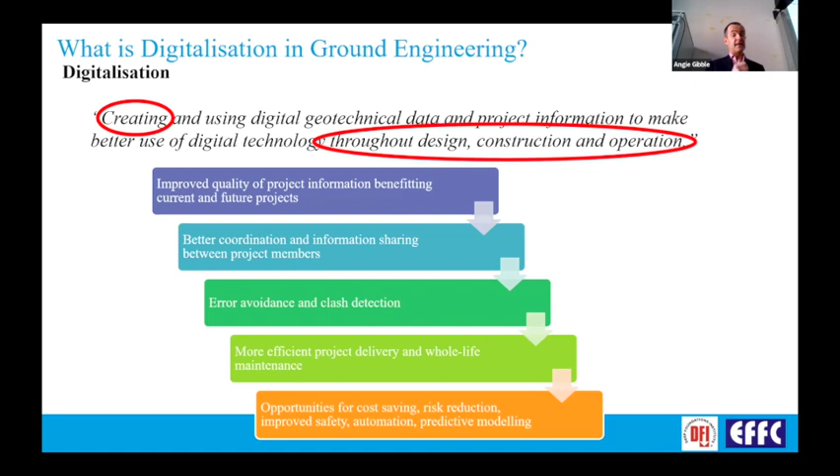Considering that project life cycle, it's very important that we think at the outset about how we create improved high quality data and project information that will provide future benefits, not just for that particular project, but for future projects as well. Once we've created that data, it enables much better collaboration and coordination between different parties if that data is shared in an open, collaborative and standard way.

I'm sure you're all familiar with the benefits we get from the avoidance of human error by using digital data, and the potential for clash detection, for example, when working in a BIM space. But we can also see that more efficient project delivery from using digital data brings real benefits, not just to the construction process, but also to the whole life cycle of that particular project and asset. So there are clearly many different opportunities for cost saving and risk reduction from digitalization, but it can also lead to improved safety on construction sites, automation of design and site recording processes, and it can help with predictive modeling going forward.

So that ethos of sharing data, doing that in a standard way, is fundamental to the success of digitalization.

I'm pleased to say those principles were embedded within the European Union's digital strategy, issued in 2020, and then the Data Act, which came into force in the European Union a couple of months ago, has at its core the recognition that digital data is highly valuable, that it should be shared, and it promotes the sharing of non-personal data in a very open and transparent way. It also promotes using standard data formats so that data isn't produced in a way that only the manufacturer of a particular piece of equipment or instrument can use it, but in a way that others can benefit from that data as well.

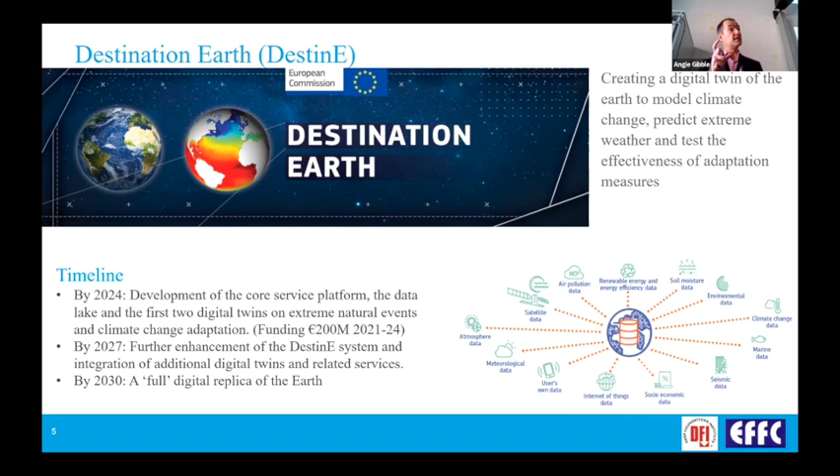It's also interesting to note that digitalization is big business. In the first three years of this particular project, the European Union are investing 200 million euros just to set up the groundwork for the data platform, the data lake, and then starting some of their initial modeling exercise. So significant investments are going into digitalization in that particular space.

But digitalization isn't without its challenges. The DFI organised and hosted a digital panel session in the UK last year at the British Geotechnical Association's piling conference, and again we posed a series of questions to industry leaders. It was really interesting to see that a number of the key challenges were all associated with data.

Whether that's the legal issues around data in terms of its ownership or the liabilities that you attract by sharing data, the issues associated with data formats, and the fact that clients aren't specifying data collation was one of the issues identified. And then also, when data is received, if it's done in a non-open or non-collaborative way, it can be very difficult to check and verify that data.

But it wasn't all doom and gloom. We didn't just ask for the problems, we also explored what we need to do as an industry to solve some of those issues. The key aspects that came up were making sure we have more industry events to help share best practice. That was really the driving philosophy behind today's event, bringing together diverse views from across Europe and the wider globe to get people's experience of best practice and how we can share that amongst one another.

Another key challenge was the requirement for standardization of specifications around data sharing and how we look at more common data formats. In one of our presentations today, Jamie will be sharing his thoughts on the work DFI have been doing globally on standard data specifications.

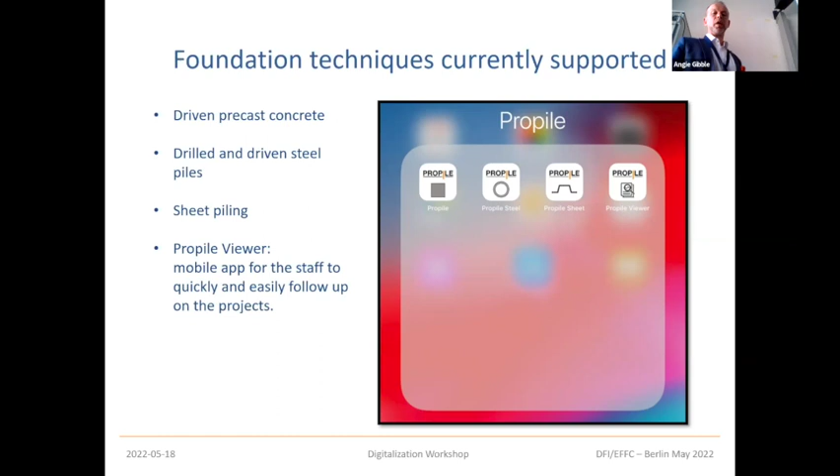Through a standard web browser, you can update, edit if you wish, and sort and find the data that you need to have a look at. As I said, you can extract the data and work in Excel. Nowadays it has come to the point where they really work in the ProPile system, but for a while they would extract the data and work in Excel because they were used to working in Excel - but it's getting better and better.

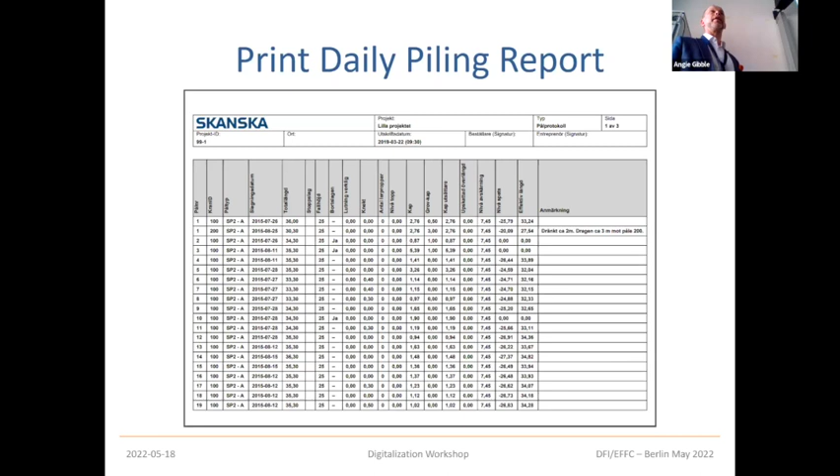Of course, you can print the daily piling report into PDFs to hand over to the client, and you can choose whatever columns you want to show or hide, depending on what's required in that project. We also have pile cost adjustment, so you can add prices into the system for what the pile costs, for an additional meter or less. So at the end of the day, you can print that and hand it over to the client and request money for additional work.

There are statistics features, so you can follow up and do prognosis. You can sort of pick two dates and see how many machine days it was between those two dates, and how many piles you've done, how many meters, etc. You can also do prognosis.

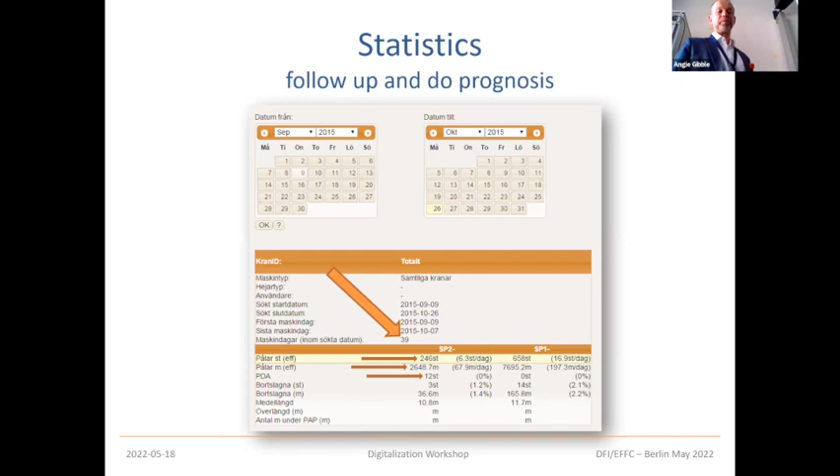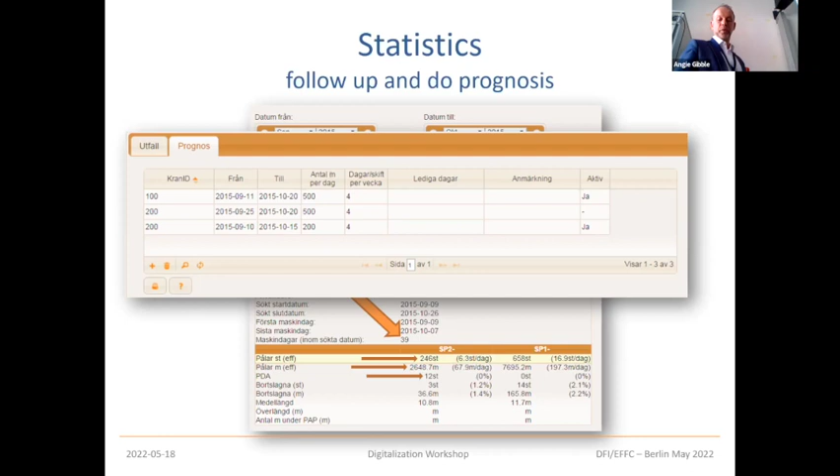You can get this in numbers as well, so you can tell how many piles you've installed, how many meters have been installed, and how many days are left until you're done.

One of the features is the barcode scanner. You have a barcode scanner that is connected to the rig, not physically, but through the web. The scanner is also connected to internet, and you state in that app which rig you belong to, so that rig can see what piles he has in front of him in his stock.

You can scan when the piles are delivered on site as an acceptance inspection, and then they will be in the site stock. You can scan the pile when it is to be installed, when you lift it up and start hammering. This, of course, improves the traceability and accuracy of data.

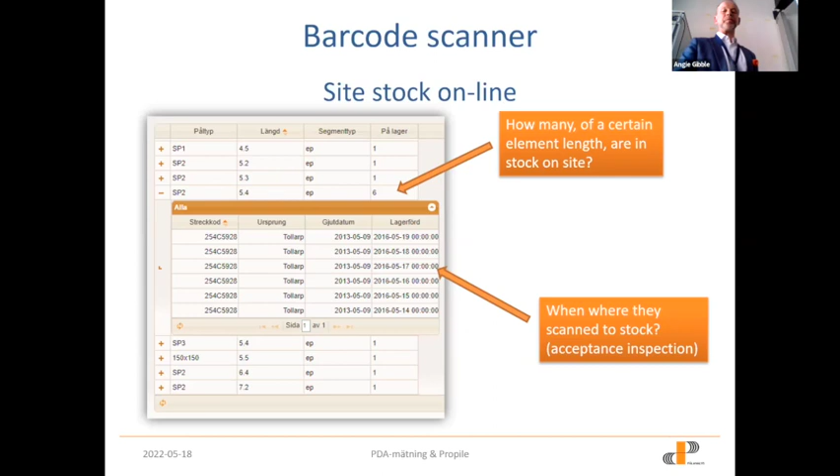There's also traceability features, so if you get an error, or bad concrete or bad steel or whatnot, you can find that barcode and see into which piles these segments went.

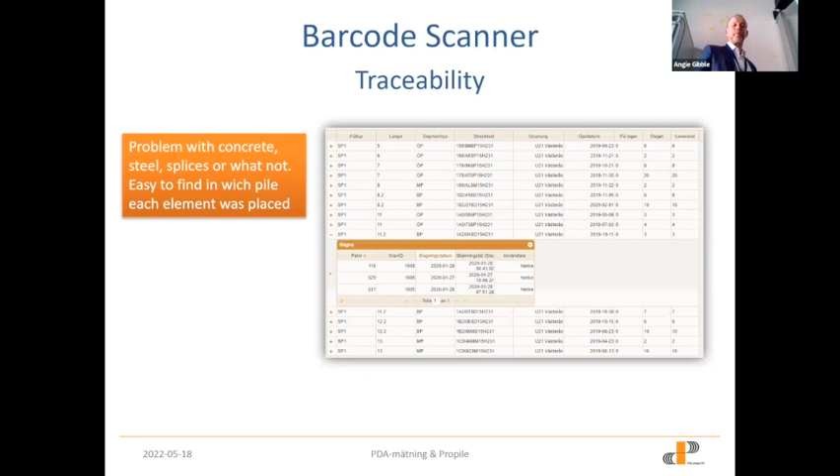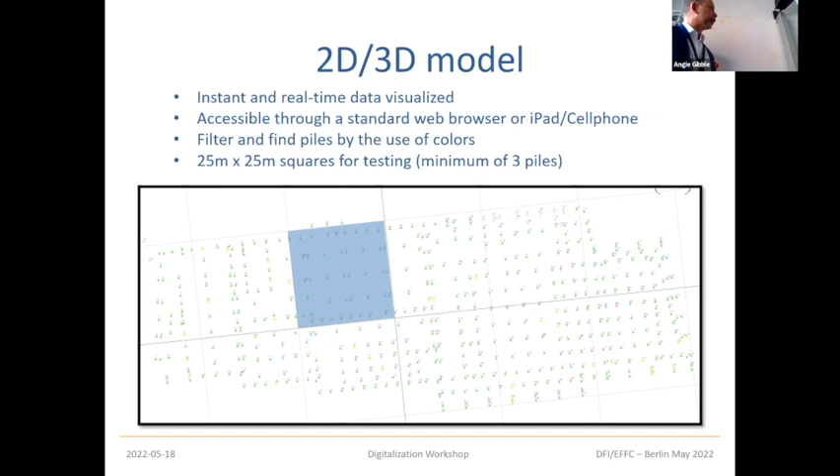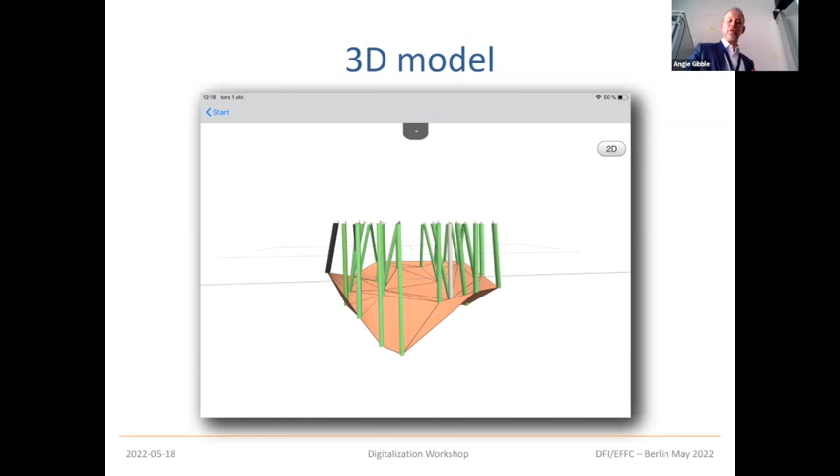Then, of course, you can go into the 3D models, so you can view it in 3D. It's quite handy in at least two perspectives, but I would say more.

What we've done now is let the computer help the site crew estimate the pile lengths. The green piles are installed and the gray piles are yet to be installed. You can click on any of those gray piles and the computer will tell how long that pile can be. You can also click on a button and get all those lengths out for piles to be installed - so the computer helps you with estimating the pile length.

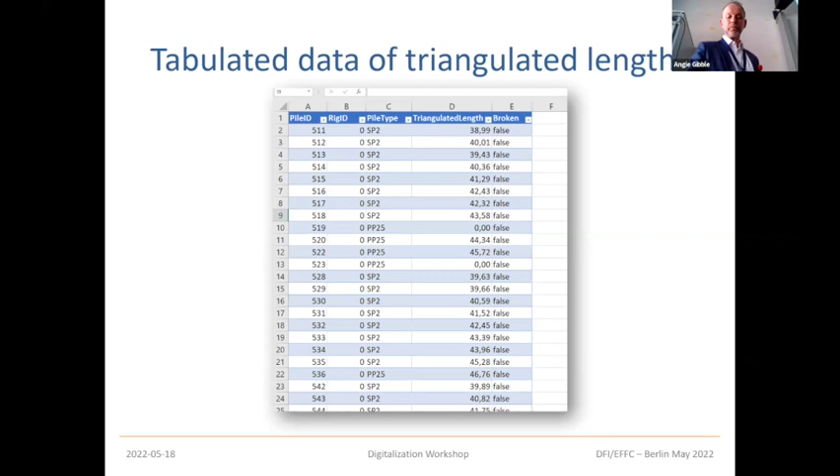It's instant visualization of actual data, and this has been proven very successful when it comes to the contractor discussing problems and requesting additional costs.

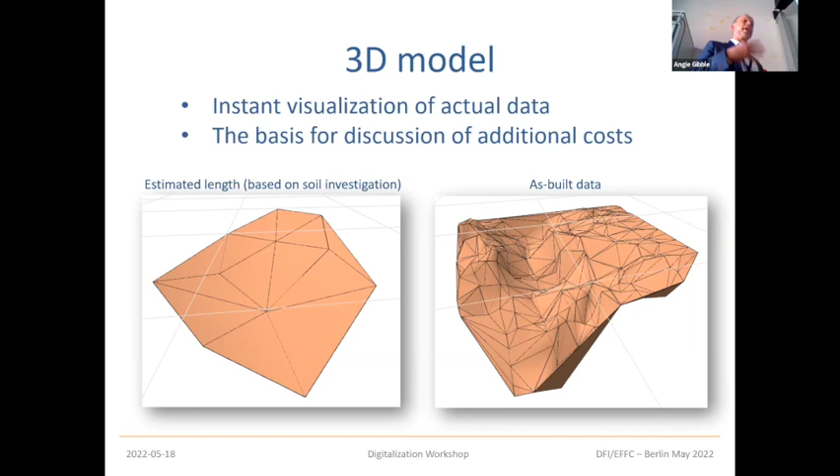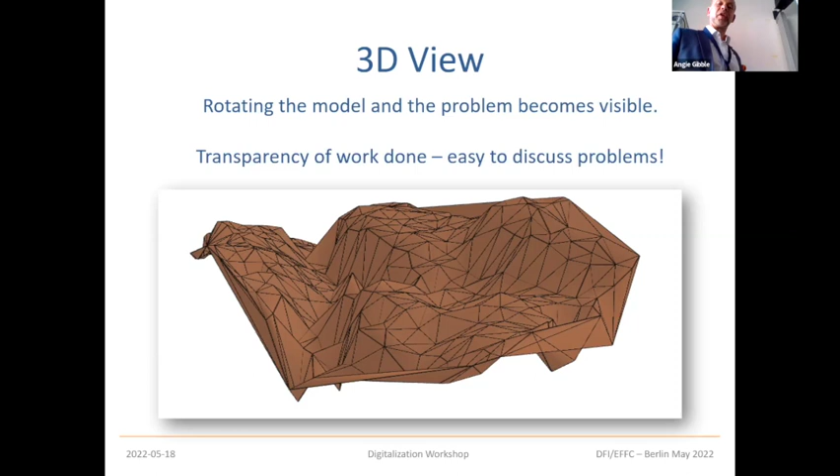So they broke a lot of piles there, but yet again, it was easy to talk to the client and request more money. So it's becoming transparent, the work is transparent to the client.

So what's coming next? We're working on getting the PDA data into the system as well, so you can add the capacities of the piles. You can think of anything, blow counts, concrete volumes, or installation time, anything that makes the model better and easier to discuss problems with the customer.

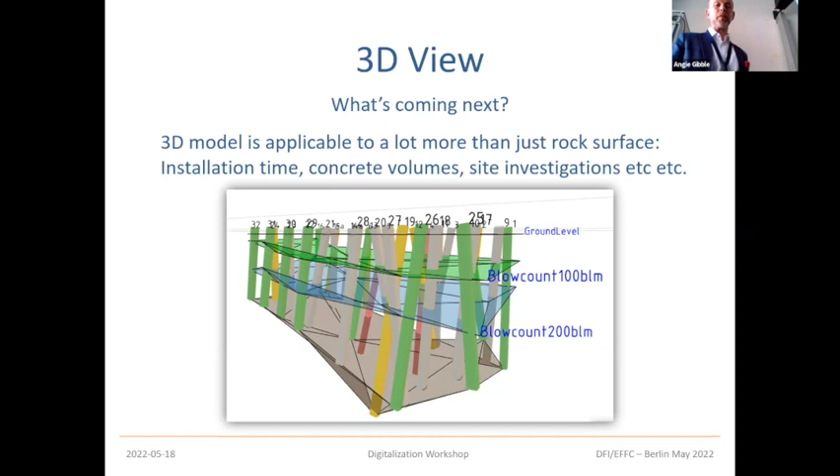The key features in the system are that it makes data available for everyone involved in real time, and it's all accessible through standard web browsers, iPhones, iPads, and so forth.

The system features are currently centered around the requirements and wishes of the piling contractors. We haven't really thought about the bigger picture yet. We started off small.

The barcode scanner improves the accuracy and traceability of the data collected. The implementation of the online 2D and 3D model has made it easier to understand the foundation and the project, and it's transparent to the client.

Finally, I want to address the key development strategies we have. We have online, real-time data, which is probably how most software is done nowadays, but it's still important to emphasize.

What we did was focus on actual needs. In our case, it was the site crew and the processes on site that we focused on, rather than the design or anything else. We had an actual problem that we wanted to support and digitalize to help them in their work.

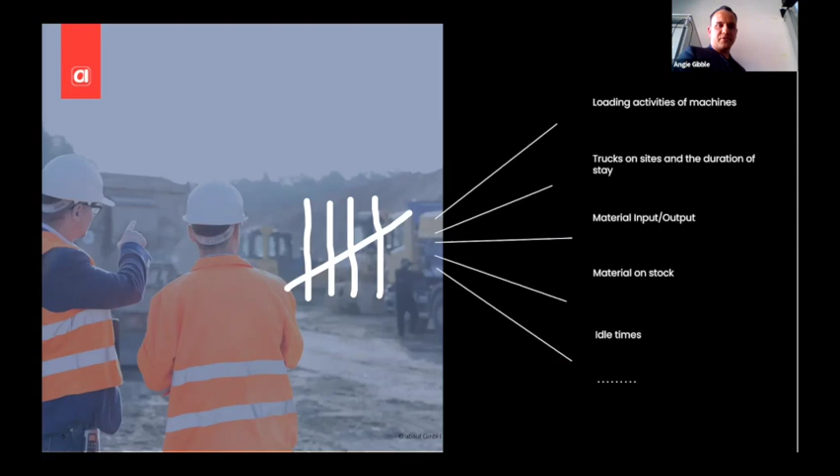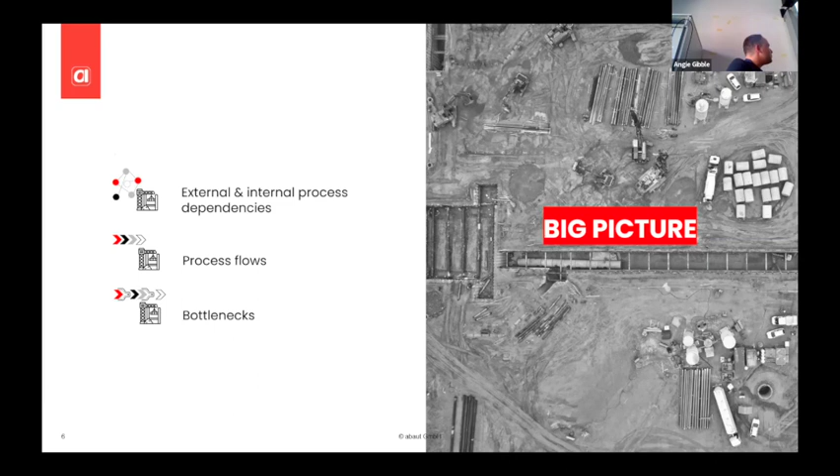So the result was, we got a big picture. That means we were able to see external and internal process dependencies. We were able, after analyzing the process flows on the construction site, to also see the bottlenecks. That was awesome.

So the results, or the reasons we detected — here are a few examples. First example: the excavator was just too weak for the task it had to do, so there were idle times, and the semi-trailers were queuing.

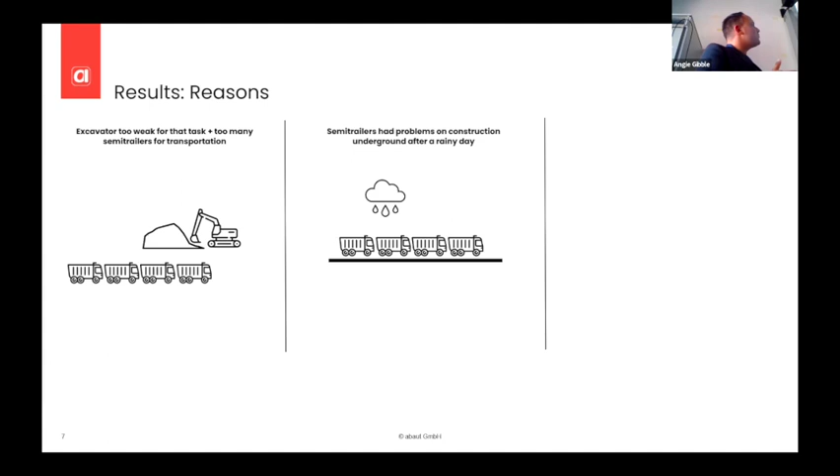It was also a problem that after a rainy day, the semi-trailers had problems with the underground, so they reduced velocity on the construction site. We also had a problem with the material supply chain. We also built a trench with pipe.

The material was not always on time on the construction site, so we had a delay of 1 to 2 days, and that also causes idle time of the machines. So here are just a few examples of what we did.

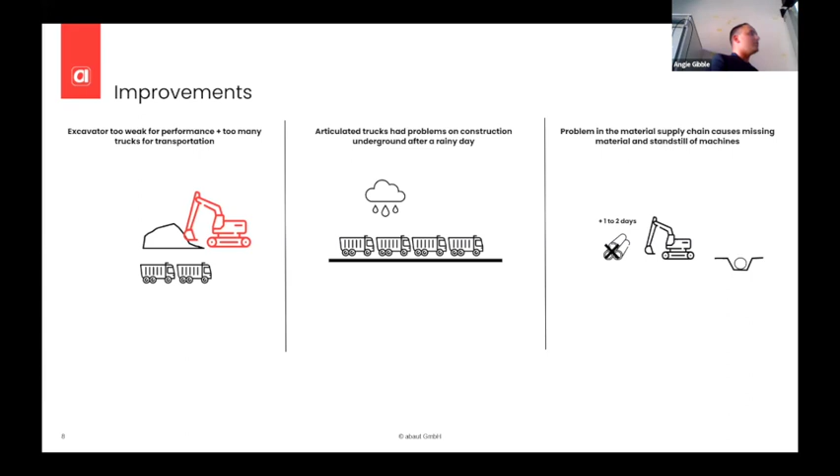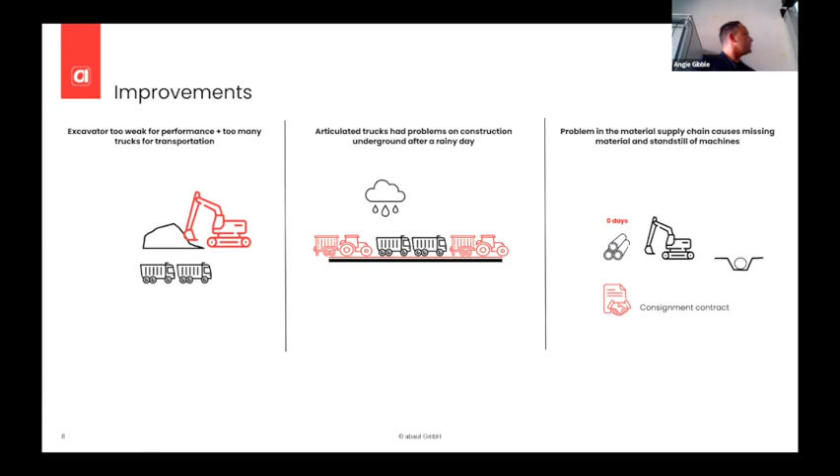It's really easy once you have the data, the data of your Strichliste. We changed the excavator to a more powerful one, so the performance was better, and we reduced idle times of the trucks. For the bad velocity of the semi-trailers underground, we brought in some semi-tractors into the logistics circulation. And last example, we negotiated with the contractors and changed the contract to a consignment contract. In the end, all these actions improved the process and the performance on site.

So I asked myself, wouldn't it be great to see the big picture from all your job sites digitally, in real time, from anywhere and anytime, fully automated. I thought it's an awesome idea. So the only thing I need is data.

And here's the problem. What I experienced on the construction site as a construction manager: either you don't have any data on your site in the execution phase - and the execution phase is really important, not the planning phase - so you don't have any data, or you don't have sufficient data. It's a huge effort to generate the data. And the last point I experienced is that data are often trapped in data silos.

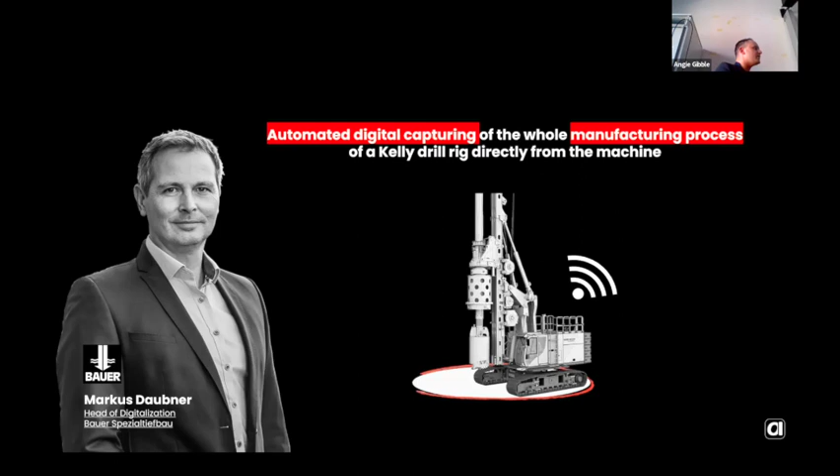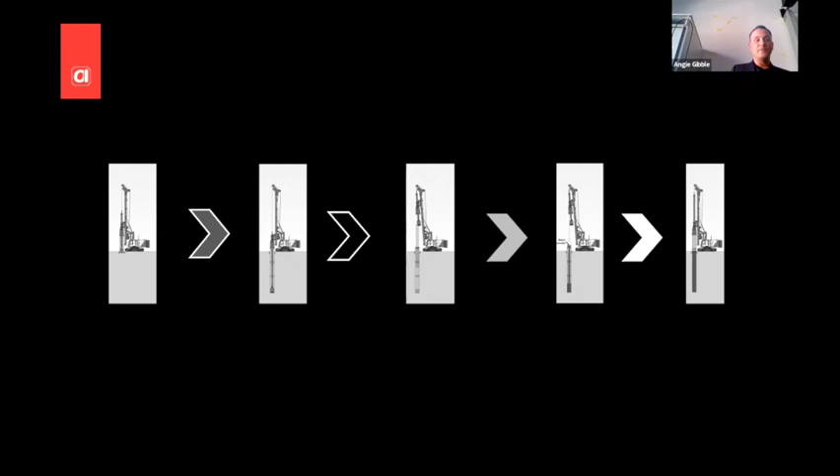So again, I need to admit, I was not the expert, and still not the expert, in deep foundation. This is the process of a Kelly rig. You have the main process: drilling, filling, emptying, inserting the reinforcement cage, concreting, pulling the pipe after concreting, and also sub-processes, for example tool change or something.

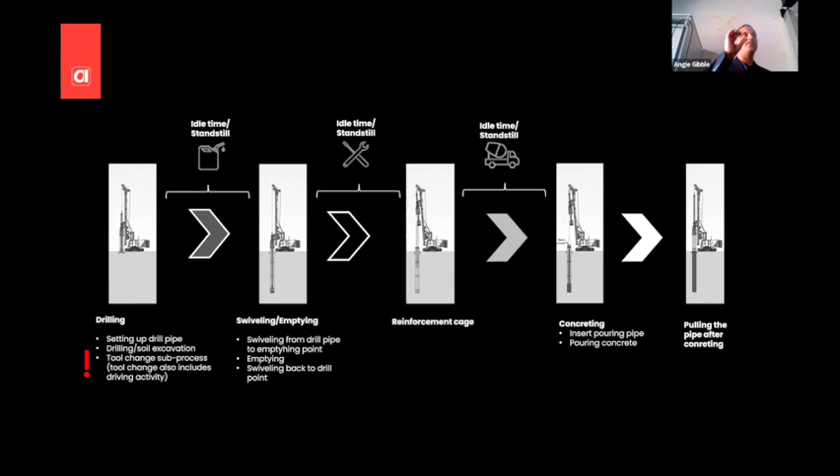Between all these process events, there could be idle times, a standstill, because of necessary works - for example refueling, repair works, or just waiting for the concrete truck. So when you only have sensor data, it's quite hard to detect specific processes. For example, it's possible but pretty hard to reliably detect things like tool change, the reinforcement cage, or the concreting process, just with sensor data.

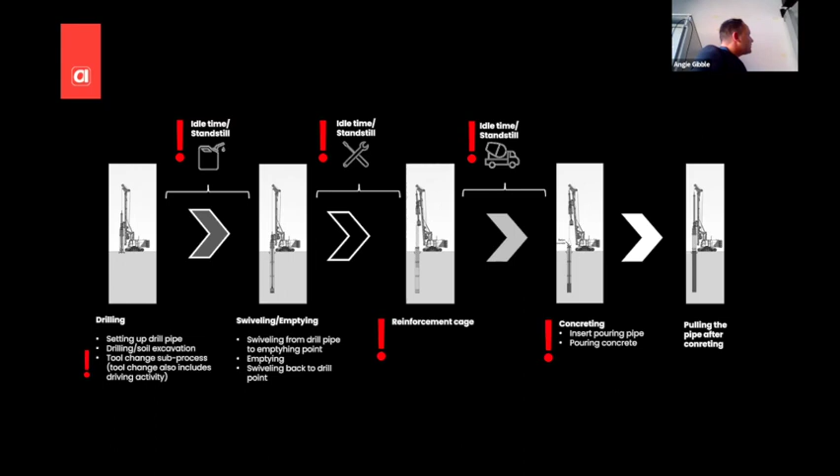In my opinion, and what we learned, it is impossible to find out the reason for standstills on site or idle times just with sensor data - for example, refueling, repair works, or concreting. So in general, this is more the general perspective.

Our customers, when we start to work with them, machine telematics data are the absolutely basic data, and it's perfect, it's needed. But again, when you want to see a specific process, really want to get that big picture and do that deep dive into your process, then it's necessary to add source data, really to get the information about external and internal dependencies. As I said, not just with sensor data, it's quite hard.

With sensor data, you would have in specific processes information gaps. And the most important thing with sensor data, you don't get the why when you have the bottlenecks - really the reason why a process on site is not really good. So my opinion is, what I learned the last four years, you can't eliminate bottlenecks if you don't know the reason. So the big question is, what did we do with Bauer or with the Kelly rig to fully automate it?

The task was to recognize the process. We added a new data source, and we taught the Kelly rig machine to see and understand the process environment fully automatically. That means we give the machines eyes.

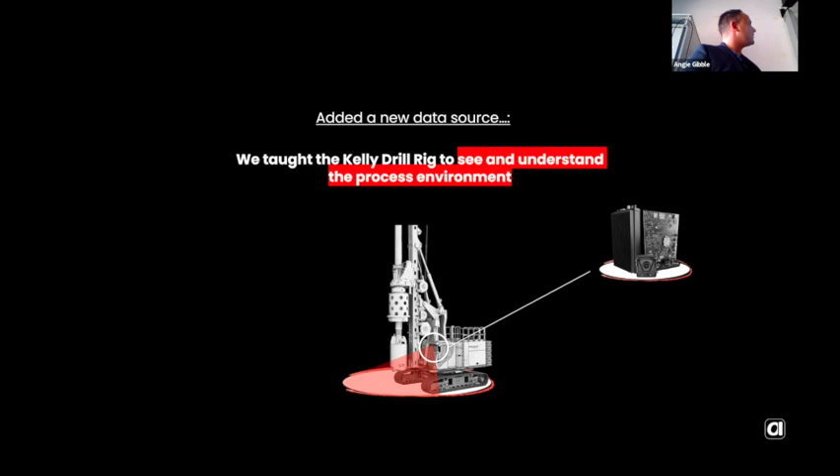We installed these devices, and this device is a hardware device you can purchase on our marketplace, the Bauer marketplace. So it's an intelligent plug and play hardware. It's an edge computer where you can also plug in a camera. That is what we did at the Kelly rig machine.

Again, it's plug and play. You can install it in less than 15 minutes. No CAN bus needed. It's really just plug and play, and the great thing is you can really install it on every machine - a drill rig, we installed it in Switzerland on big mining dumpers and excavators.

It means we don't generate data every 10 or 15 seconds. Every time something specific happens - for example, the swiveling, or the machine stands for more than 5 minutes - we can generate an image and do the analysis with the sensor data plus the image data. So at Bauer we have two lines in the backend, the SDP and the IDP. The SDP stands for sensor data pipeline and the IDP for image data pipeline. We are able to process these different kinds of data and fuse them after a specific time to really understand the process.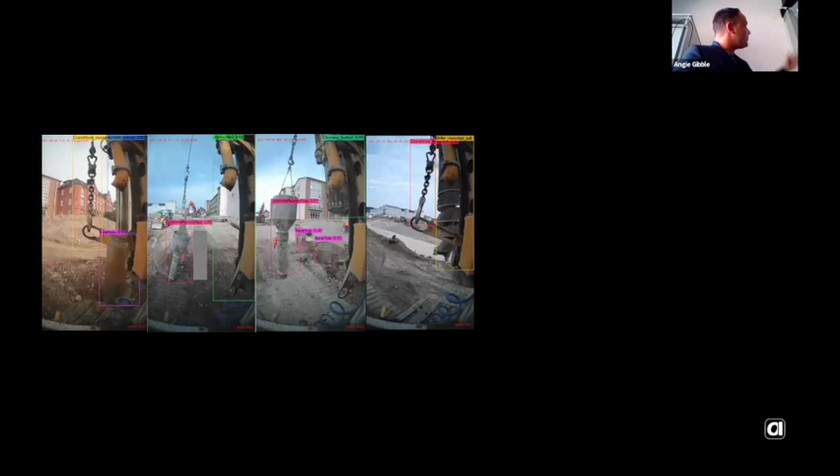Here are a few examples of how the image classifier, or image algorithm, works and detects things fully automatically. As I said, for example this pouring pipe - quite hard for a sensor to detect that process - and these are image algorithms which detect that process in the images. For example, also the drilling - we have here the swiveling or drilling, and swiveling then to empty the rig.

That is also important because you see the soil, or the color of the soil. So you could also train algorithms, for example, to detect specific soil classes. Maybe we didn't do that, but it could be possible. And the last thing here is an example of a reinforcement cage and setting of a reinforcement cage.

So to dive in a bit deeper, this is how the artificial intelligence, the image classifier, really detects some examples during construction activities. This is the first example - as you can see here, the Kelly drill rig just does the work and the swiveling. You can see the rectangles.

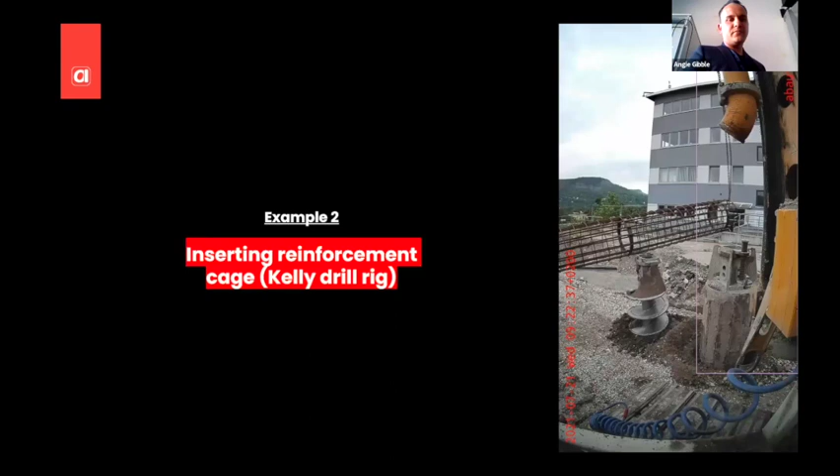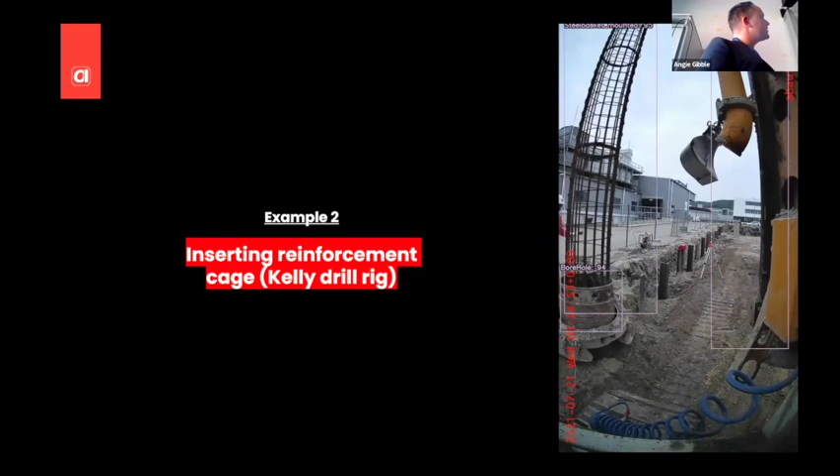This is an example of inserting a reinforcement cage - I hope this is the correct term. So as you can see here, again, the image classifier detects also the borehole, for example. And of course we have for each image also the geo position. One moment. And the last example is inserting a reinforcement cage.

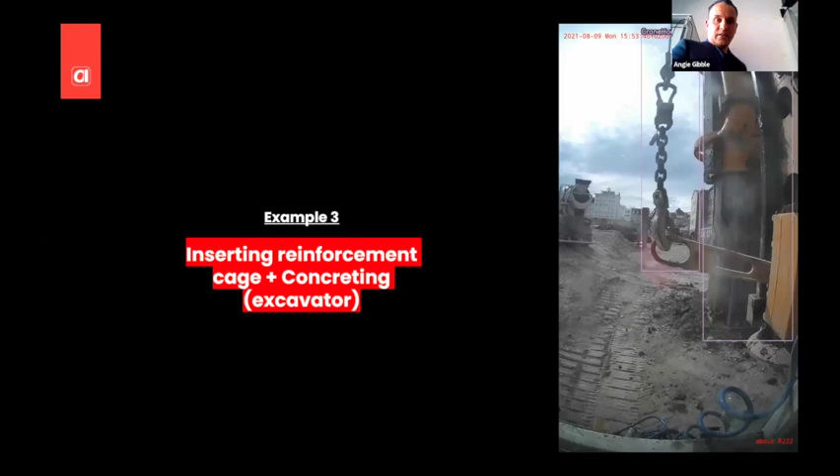It's an external process, not from the Kelly rig. As you can see here, it's inserting the reinforcement cage and also the concreting process afterwards.

So all these are process information, and this process information is delivered to the backend of our system. Additionally, the KPIs are directly transferred to a software as a service dashboard, where you can analyze and see the process fully automated.

I don't want to explain that in detail, but you can really see the duration of the process and things like that. And the most important thing, again, it's fully automated, no manual work to do.

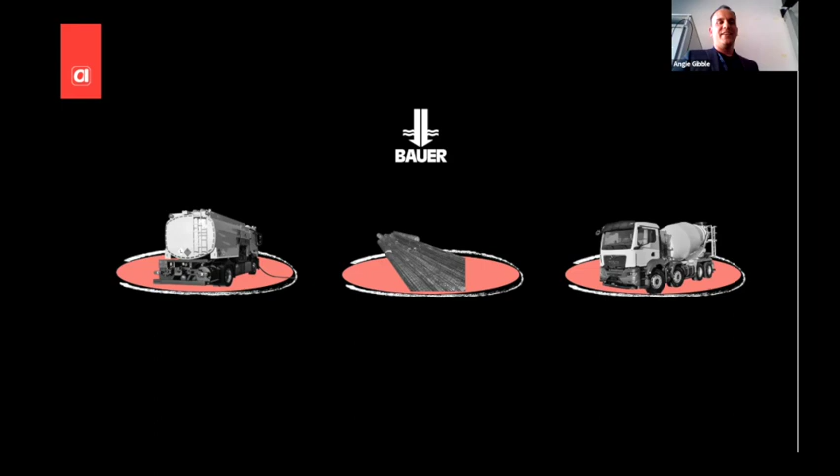A little teaser, I'm not allowed to speak about that. With Bauer, we currently work on other algorithms and use cases, especially for finding the reasons for idle times or standstills. As I said, I'm not allowed at the moment to talk about this, so that's to be continued. Maybe next year we will see.

Now, at the end, my conclusion. What data and data analytics, and this is a really good example of Bauer Spezialtiefbau, can do, or what you can reach. The first thing is, the big picture you will get with data and data analytics.

The second point is that with data and data analytics, you will be enabled to make faster and better decision making on sites. The third point is, of course, idle times and the reasons, so the efficiency and the productivity you can increase. And the last point, really important, we save resources and reduce environmental impact, which in my opinion we desperately need for our society to do.

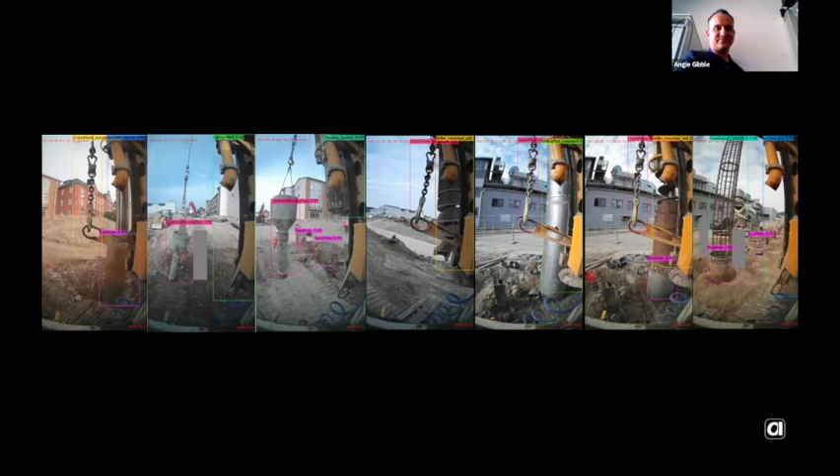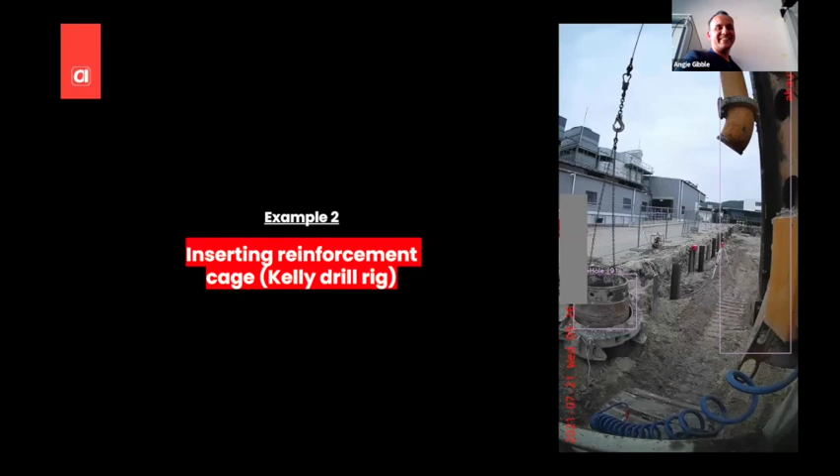Yeah, absolutely, thank you. I was wondering - the example you presented is primarily related to building construction, right? You mentioned a few other applications of image correlation. I was wondering, have you used these devices for damage detection, or for defects, before-and-after pictures, or like you mentioned, identifying excavation material type? Can you explain a bit more about these methods, or was what you mentioned more about external data, which is quite hard to get from a machine?

So what I presented in the last slide - in the end, we're working on that to really find the reason, but I'm not allowed, as I said, to talk about this. Maybe another example: we also work for the German railway provider, Deutsche Bahn - quite famous. We have two big construction sites there.

There we detect as soon as a truck or any other vehicle enters the construction site, so we count it, and we also analyze what it has loaded - for example sand, soil, or stones. We analyze this and Deutsche Bahn gets information about the mass flow on the construction site, and also has the possibility to check invoices. All the systems are also used for claim management, which is quite interesting - sometimes just the image itself, since we have the image in the system, so our customers just use the image for better claim management possibilities, I would say.

Or maybe Markus Daubner from Bauer Spezialtiefbau could answer that.

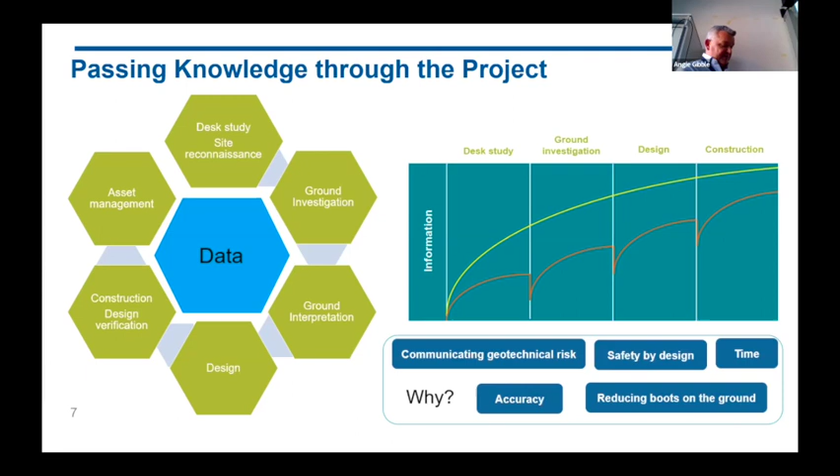So as I say, it will just generate some standardisation there. I think, from a contractor's point of view, I deal with contracting.

I look at the rigs out on site, physically putting the piles in the ground or the foundations in the ground. You've got to look at the real-time collaboration we have out on sites with the design office and into the sites. I think the data transfer we have at the minute is a lot better within the design office, within the planning stage, than it is down at the construction phase.

Perhaps the presentation we've just seen in capturing data at construction stage, I think we agreed there, back in 2018, there was a lack of information, or there was siloed information.

The way to get that from the site is to have simplistic information or simplistic apps and tools to capture that. If you've got the very clever information from the imagery we've seen in the previous presentation, and that can be fed into a standard application so the guys on site can actually use it and have that information, they will be able to take the information from the design office, look at it in a simplistic way, input the construction information in that standard format to feed it back.

So getting standardised tools that are talking standard language is key. And again, with Balfour Beatty, we are developing standard applications now, as other companies are. But I think the key around that is getting the consistency in the language we're using in those applications, or else you move from one company to another and you're using it in a different way and capturing it inconsistently.

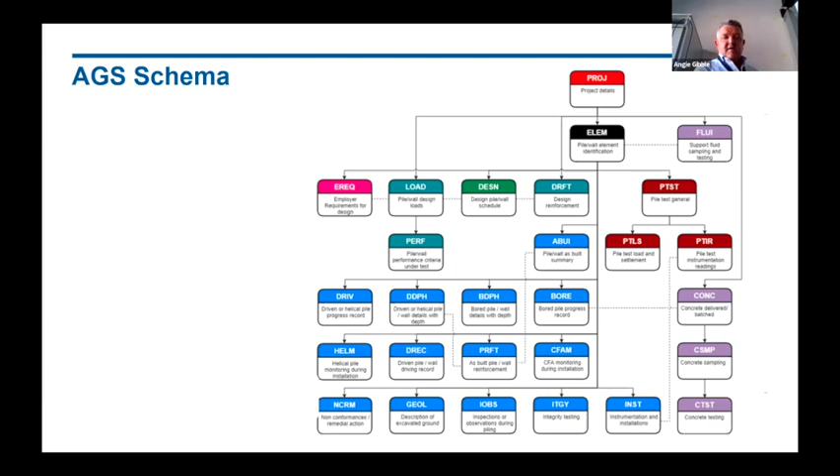So as we said, that's in a trial stage in the UK at the moment. The beta version has been developed, it's out and being trialled on HS2. HS2 have agreed that that's a very good project to try and trial and get this running through in a standard way.

Problem with HS2, it's a very large project. There are 7 different construction sections going on. Most of the different construction sections are being led by joint ventures, both at construction phase and at design phase. So you've got a lot of people involved to try and make this work and to try and get this trial working.

The benefit of HS2 is they did have the foresight on RSP2 to do a lot of preliminary test piling well ahead of the construction works. That was viewed as a very good area to trial and to give some testing to this AGS format, the preliminary test piles. If we could turn the preliminary test pile data on all of these 7 different contracts on HS2 into an AGS format, it would give it a real good test.

The problem, as I said, is we've got a lot of different people involved. So this is an example from two of the contracts, the N1 and N2 contracts, that I've been involved with. Here we can see we've got HS2 involved, we've got a principal contractor involved, which is a joint venture. We've got a design JV involved, which is a joint venture, and we've got a piling subcontracting organisation, which is also a joint venture.

All of which have got to buy into this trial and develop and learn this new way of working, trialling AGS for no real benefit, because it's not contractually required on HS2. It's just something that if we did it, it would give us benefits. And we can see the DJV, they've got an element to do, they've done that without a problem. They've worked together and got the AGS format going.

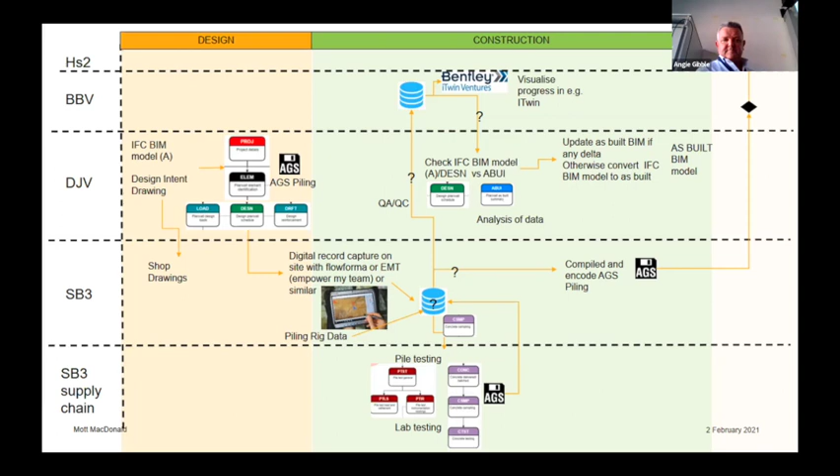Okay, so moving on, back in 2018 when I presented this stuff, I thought there were a number of blockers, a number of issues that were getting in the way. Some of those are the same, some are different now. I think I picked out 5 main areas that we have issues with in getting standardized digital data working properly on foundation construction sites.

One is, by definition, foundations are typically at the front end of the projects. So we find that projects aren't set up, they aren't running smoothly in the way they are by the end of the project, or by the superstructure or whatever else is being put on top of the foundations. I think there really needs to be a digital mobilisation as well as a project mobilisation. We're all mobilised to get onto site, but we mobilise and start building things before we've actually got the project set up properly digitally.

I think when we start building and getting going, the follow-on stuff that comes after the foundations is a lot more advanced, because there's more time to get the digital processes embedded within the project processes. Does that make sense? So I think having a digital mobilisation, and reference to digital mobilisation at the front end of projects, would be the solution.

Two of them are around shouting about what we do - conferences like this, I think, are areas where we're seeing excellence and where we're seeing good things going forward. So we have to educate clients, and we have to justify the cost of learning curves, I think.

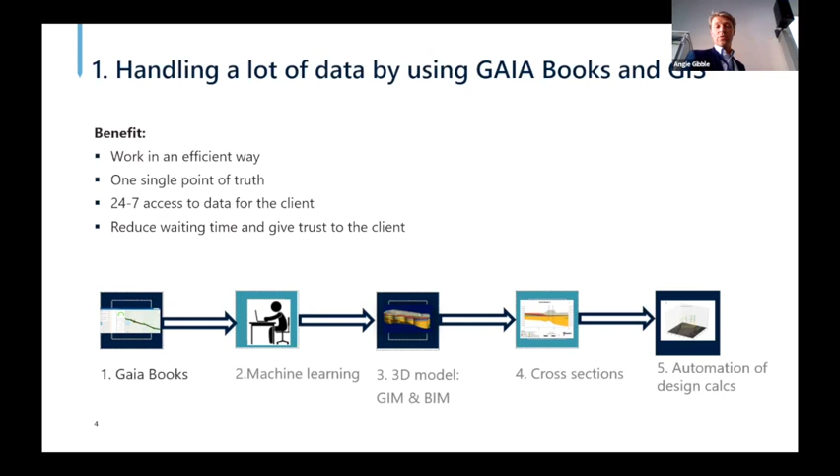Now here you can see how it is looking. So here you have the A9 again, from here to here, 2,000 CPTs and 120 boreholes. The locations are there. When you zoom in, it looks like this. All the data points are there.

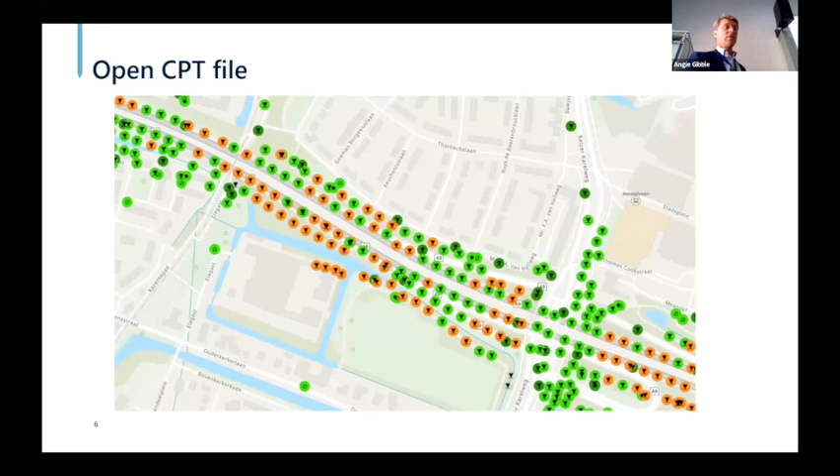And when you click on one of those data points, you get into SharePoint, and then finally you can see the CPT. It's nice to look at the CPT. You see here in the beginning a sand layer, but then from -4 until -12, there's a lot of soft soils, clay and peat. It's really a difficult area. You can also see that we are underneath sea level with the surface.

So the whole project is underneath the surface level of the sea. Now, when we collected all the data, we said, okay, now we have to do the interpretation and classification. So we have to look at the CPT data and define the layering, what kind of layer, where does the layer start. And since this is a lot of work, we were again pushed by the contractor to do it as quickly as possible.

So what we decided to do is reduce time by using machine learning, training the computer to classify and interpret soil data. We also wanted an unambiguous interpretation, so not like one geotechnical engineer classifying a layer as peat and another saying it's soft clay. Then you get discussions, and you don't want that. Also, for the geotechnical engineers, interpreting 2,000 CPTs by hand is quite boring, so we wanted less repetitive work for the engineers.

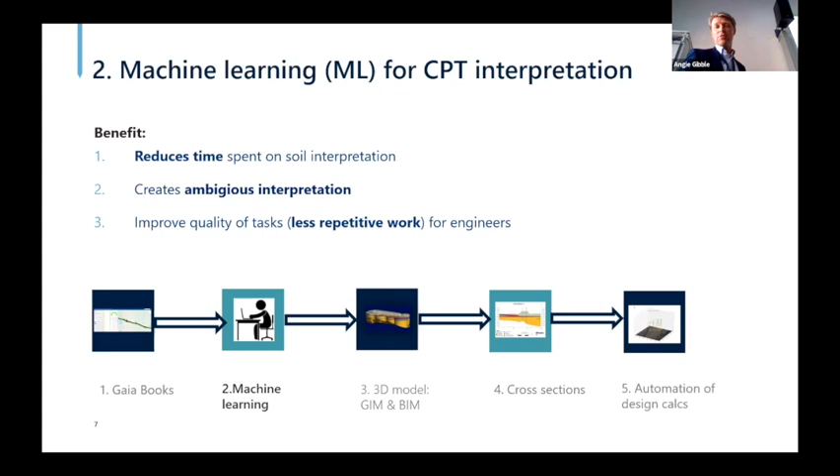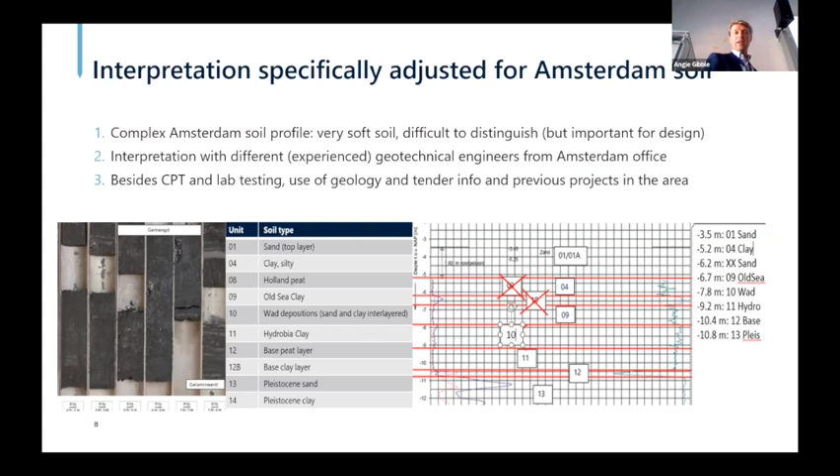Now, how did we do that? We have a lot of experience in Amsterdam. The senior staff there know the soil really well. So with 5 of the people, we sat down and looked at around 40 CPTs at the beginning to make a proper classification and interpretation of the data. We used our experience, lab testing, and discussed in detail which layer this is — we call it old sea clay. Yes, that's correct, another one said no, it's Hydrobia clay. We had real discussions in the beginning, but finally everything was clear, and the 40 CPTs were done.

Then one engineer continued and did another 360 CPTs. So in total, we had 400 CPTs fully classified and interpreted, and that was our training data set for the computer.

So we said to the computer, okay, this is a CPT with cone resistance, with friction, and this is the layer connecting to the right depth. This is your example. Now take another CPT and make your interpretation yourself. And the computer starts to learn and improve itself.

So here you can see an example. In the beginning, the computer said, okay, this is my interpretation. But we said no, you should also discover old sea clay. Later on, the computer came up with an extra layer because it's learning itself. Another example is given here, and that's the end situation where we said now it's almost ready to start using — the errors were so small that you only had to adjust a little bit of layering, and the work was not so much anymore.

So in the end, in a real short time, we had the interpretation of all the data, and it was all corrected and checked. From the data and interpretation, we started to build a 3D underground model, a ground information model. How did we do that? We used, in this case, Leapfrog, software from the mining industry.

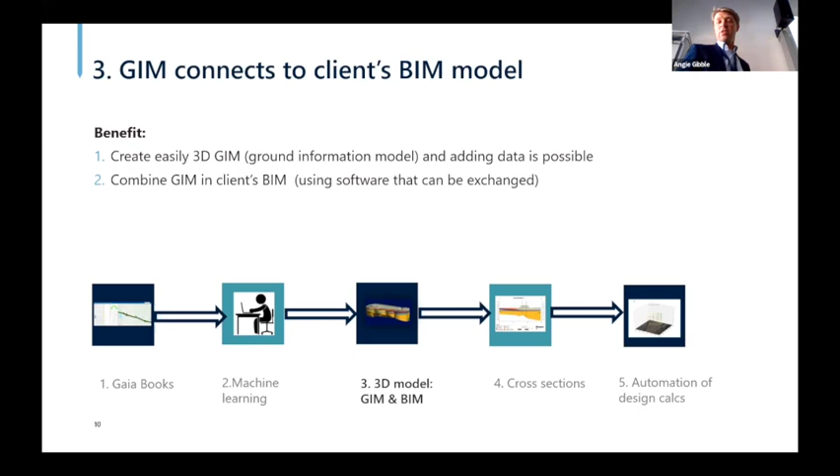Developments in the software are going really, really quickly, so maybe next time you take another piece of software because someone is buying it or developing something else very smart. It depends on the developments, but this time we said Leapfrog is the best for us. And we combined all the data from the CPTs — this was the input, which we put into the Leapfrog model.

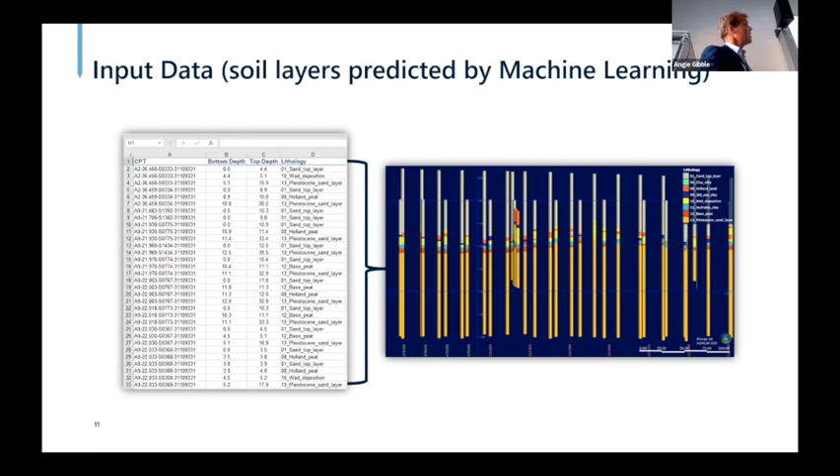And then Leapfrog can build itself a fully 3D ground information model. Of course, there's interpretation between the CPTs, but the distance between them, since we had so many, was really small, like 22 meters or so. You can also see that the top layer here is gray, which is the embankment of the A9, that is sand. And you get a gap here, and you might say, hey, the highway has a gap — no, this is of course a civil structure which is not modeled by us, but is concrete.

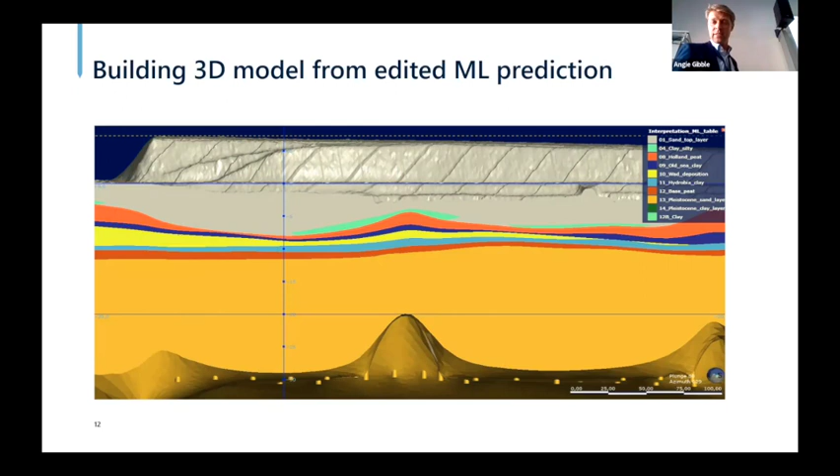Now, in the end, we were able to combine our ground information model with the building information model from the client, so you got the total model of the whole area of the A9 in one model. That was the first time we did that, and it really created additional benefit.

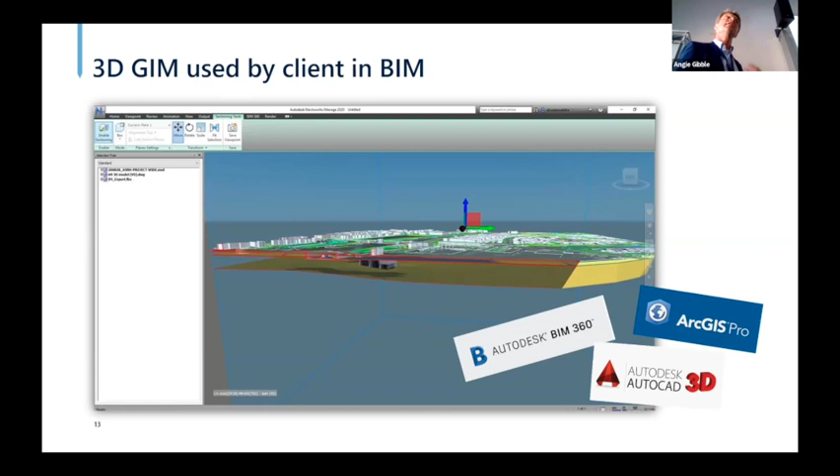Now, when we had the 3D ground model ready, we said okay, now we start with the design. The design work was also pushed by the contractor, and we had to hurry up. So we said okay, we want to have the 3D model as a basis, and we take from the 3D model longitudinal sections and cross sections to start our calculations.

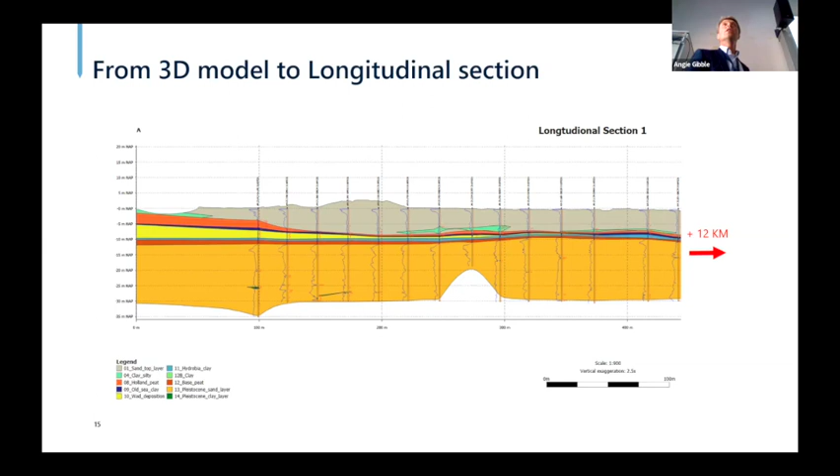And that is easily done. In a few minutes, you get a longitudinal section of the whole project with all the CPTs in it. You also get cross sections from the 3D model, and you get this kind of pictures.

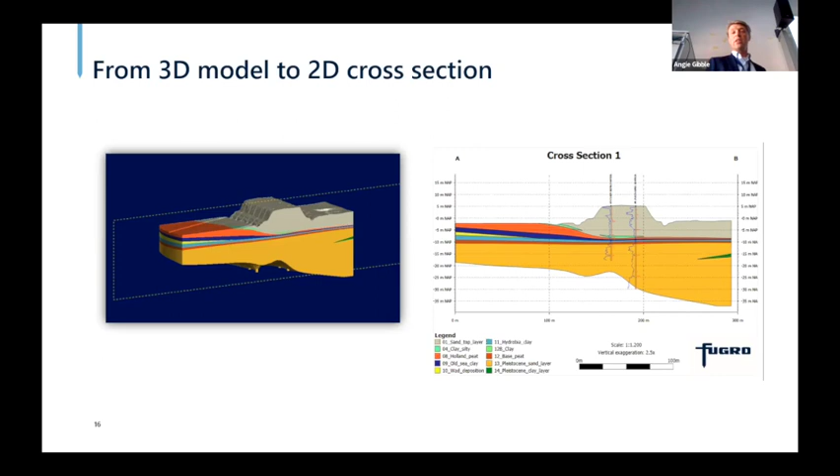Then we said okay, we take the 2D cross section as a starter for the geometry of our calculations. So we took over the cross section, for example here, and used that to make an input file for our calculations.

For example, for settlements, stabilities, that kind of stuff. We didn't need to do that anymore by drawing or programming. No, it was taking out of the 3D model into a 2D cross section into the calculation.

Then we said okay, now we have to run many calculations because design is changed or phasing is changed, so you need to do a lot of redo work. So we said okay, we will automate our calculation. For all those cross sections, we made software with Python to do the calculations in one run.

And to get proper revision management, because that's always the trouble. You make a calculation, then someone else makes the calculation again, and in the end sometimes people get lost. What is the reason why we did that extra calculation? What is the last version? What has changed? Nobody knows.

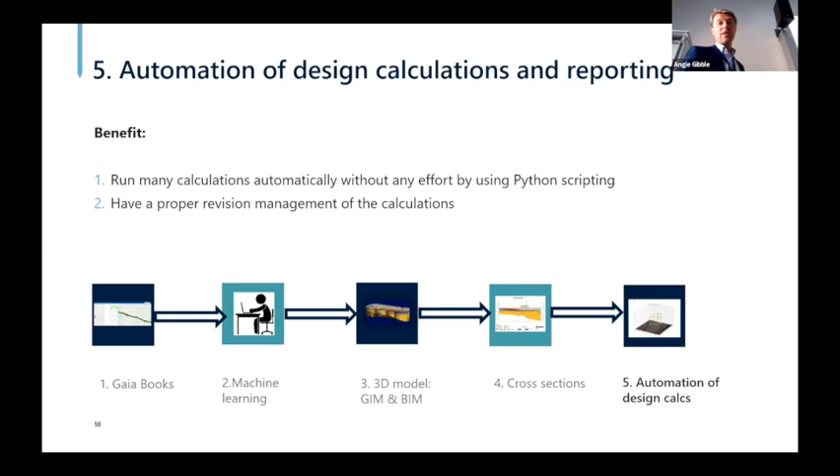But now we get a proper revision of that work, and of course it's more efficient, and you avoid making mistakes. Now, how does that look like? Here you have an example. I hope this is working now, because that's always the truth.

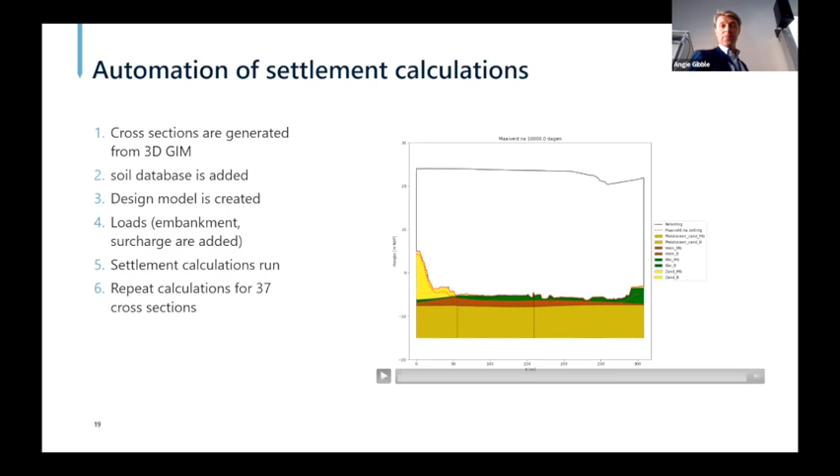This is an example of one cross section, but we could do that for many cross sections, as shown here. You can easily make, in this case, 37 cross sections, the calculations in one row. This saves a lot of time, and again it saves problems with revisions and so on. Now I want to go to the next slide.

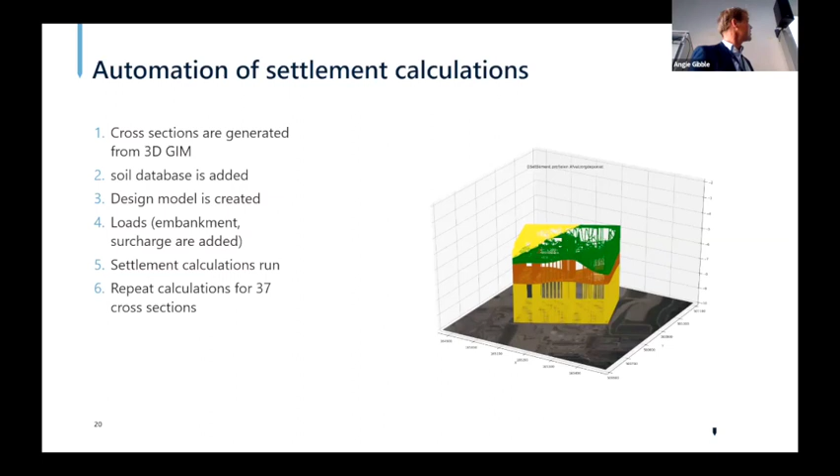Yes, so that was the example. So we made it possible, with 5 steps, to deal with a lot of data using our Geo books. We used machine learning to make the classification and interpretation of the data. After that, we built a 3D ground information model.

From that model, which was a full model because we had such a high density of data, we could easily make cross sections, and those cross sections were used as input for automated calculations. Now, that is, according to us at the moment, digitization in geotechnical engineering.

I talked about settlements and so on, but we can also do this for piles, of course. But then you look more at GIS plates, and then, for example, where you have all the CPTs, you can also easily calculate pile tip levels and so on. So that's a little bit different, but same principle.

Now then, part two: the perspective of digitalization in foundation engineering in the Netherlands, according to me. I don't know everything, but I did my best.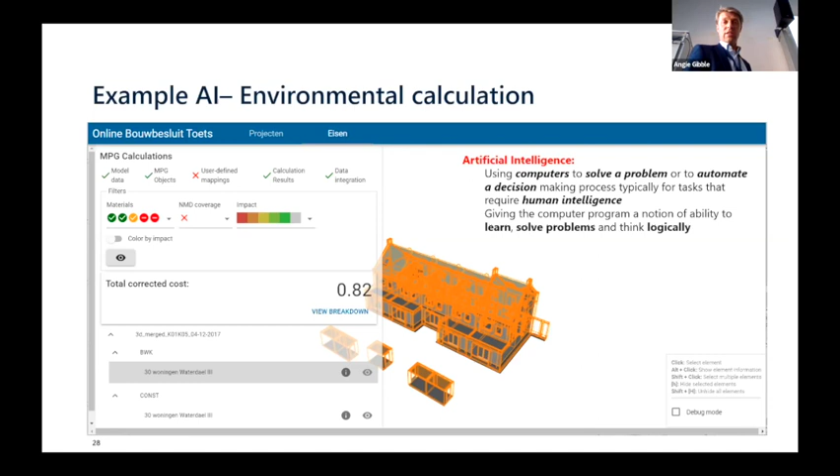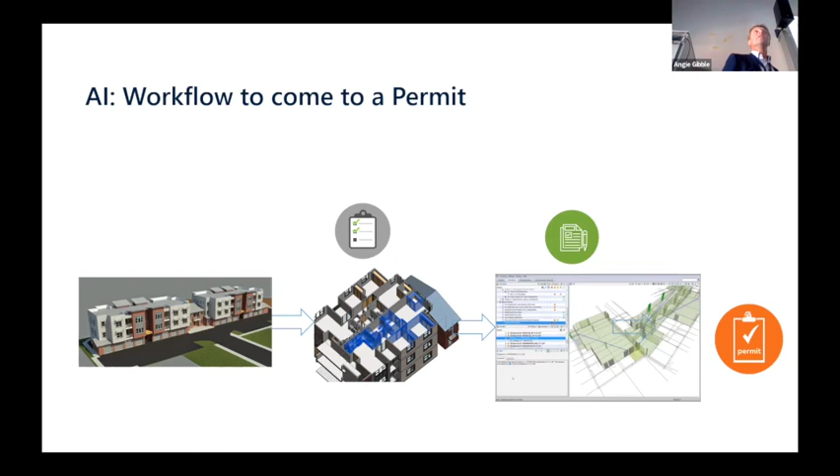Here's another example with a permit. So with buildings, automatically fire and safety checks are done by the model, and it's also checked against the area where you're building, and in the end the computer says, okay, you're getting your permit, and no human is involved in it anymore. So that's going to happen, or is already happening.

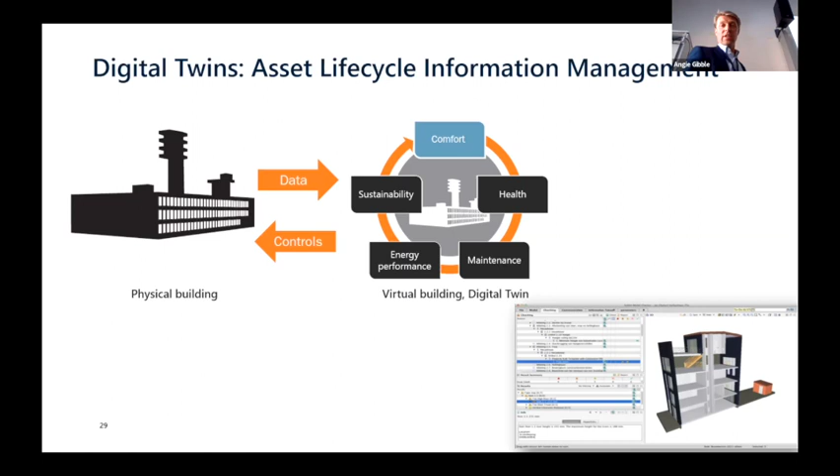Now the last topic, asset management during the life cycle, will be very important. I already experienced with our government that we said, hey, you can measure bridges or tunnels every month and share the data with you, and then you can see when you need to do maintenance depending on the information. But they said no, we don't like to have the data, because then we're the owner of it, we have to manage it, and maybe after 7 years there's other software, and we have to come up with a solution for that, which will cost us money. So they're really afraid of the data, and I think in the near future people will start looking at that, because we have to deal with this.

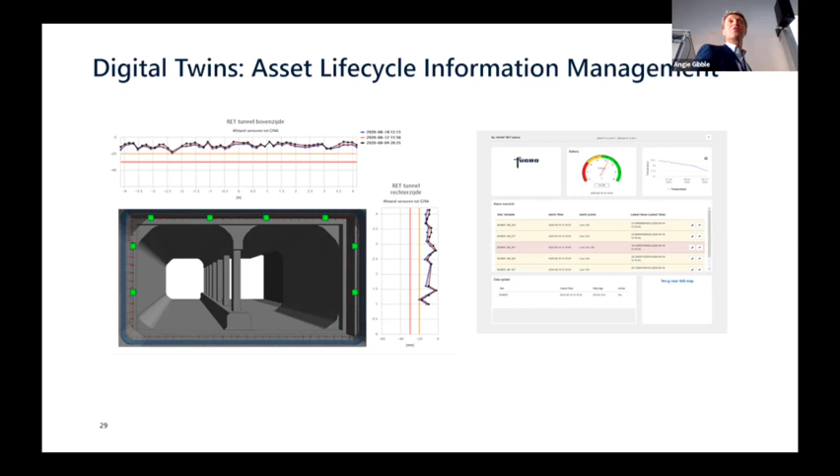This is an example of a tunnel. All tunnels in the Netherlands from the 60s, we measure them now to at least have a feeling about their behavior, because building a completely new tunnel is of course very expensive. So it's better to find out what is happening and do maintenance, but then you need to measure.

But when you look at geotechnics, we are always dealing with soil. So it's not like you have a standard and use always the same standard for every project, because the soil differs and the project is different. It's totally different talking about 10 kilometers of highway instead of a building pit of 60 by 80 meters in the middle of the city. So you need to adjust, and I think we need to be aware that you cannot standardize everything. That's impossible.

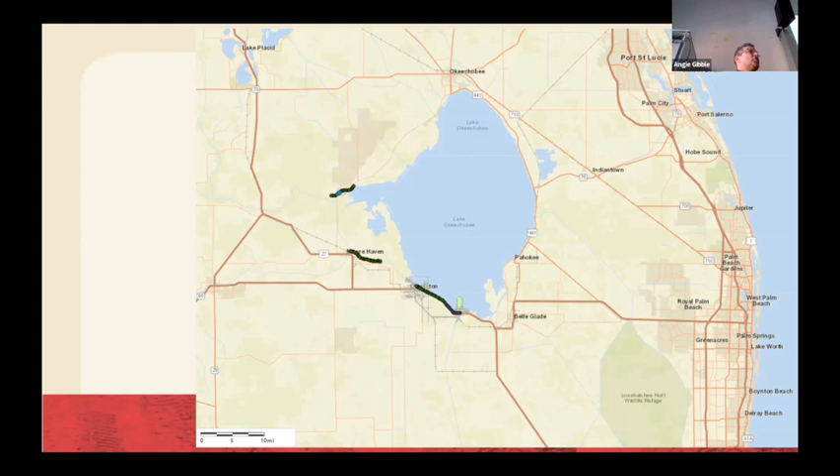So they're very slowly building cutoff walls and jet grout curtains in different areas to reduce seepage, mostly in the overburden. My firm has a scope to handle the data and meet specifications, similar to the ones I'm waving around, so that owners can get this data in real time.

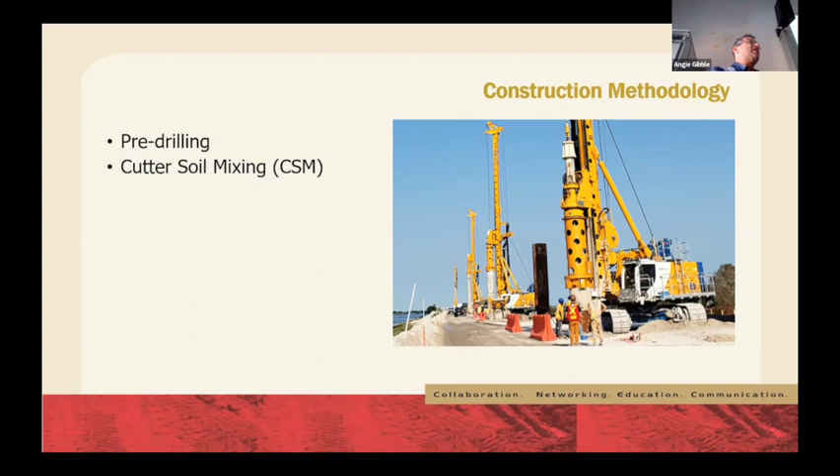Briefly, there's construction that requires some pre-drilling, and in this case it's cutter soil mixing because Bauer is involved - basically rectangular panels of slurry that overlap to create a continuous seepage barrier. The challenge with verticality, as I've mentioned, is that if you're installing very deep elements and one deviates a little up station and another deviates a little down station, when you get down to 50 meters or more, there may be areas of insufficient overlap.

So a lot of the data we collect in 3 dimensions and put into this database and visualize in the GIS is focused on proving the quality of the wall from a continuity perspective, so there aren't gaps. But there's other data collected as well - geology, quality control data, pre and post installation, field data, etcetera. It all goes into the database, it's all visualized in the GIS, and it's all covered by the specifications.

Nothing really magical here. We've got a database - enterprise database, central database, whatever language you like. We have tools to put things into the database and tools to get things out and visualize them in the GIS. But this is all one continuous, documented system - no silos, no parts that aren't eventually put into a database and documented per the specifications.

You've all seen databases before, so I won't show you much here, except that one of the challenges we have, at least with government agencies, is direct connections via ODBC or other technologies that have to go across a firewall to view data. So sometimes we get around that by putting data on a website in interactive tables, but we find - and you'll nod along joyfully as I say this - we get a lot of 'well, can I just have it in Excel? Can I have it in Access? Can I have it in something that I'm used to?'

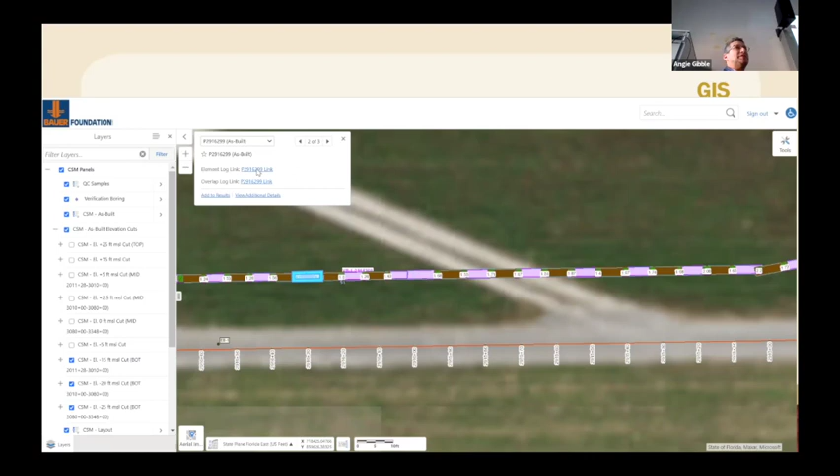So here's the good stuff - the GIS. You've seen interactive maps before, I'm sure. Everything in the database that has a geospatial location can be visualized in 2 and 3 dimensions on a website. And you'll see there are little numbers here and little lines that represent the overlap at multiple depths. That is the most important aspect here, and what is ultimately looked at by the owner before they click on these things and get the hyperlinks, as you're seeing now.

So we have data collected from a drill rig. It's immediately uploaded via an FTP site into the enterprise database, geoprocessed into 3-dimensional geospatial elements, visible in the GIS, and exported to these various PDFs.

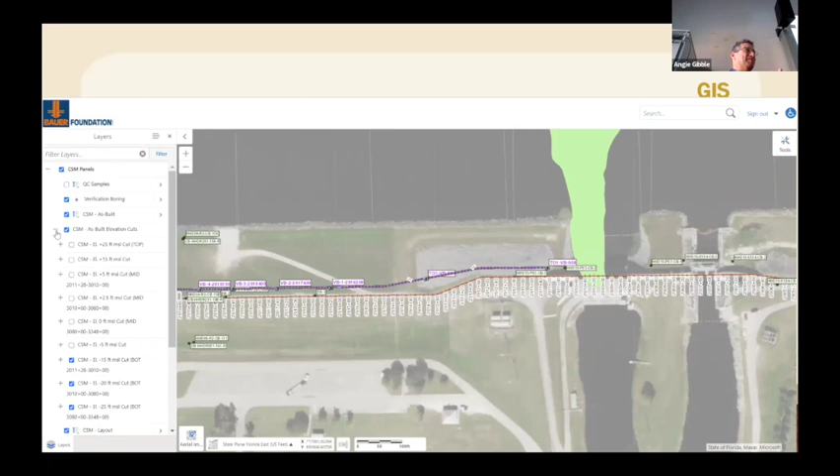I went through that very quickly because we're out of time, but do let me know if you want to see some of this in more detail. Anything geospatially in a planimetric view can also be shown in a profile view.

So we have the exact same technology in profile, the same overlaps, but here shown at their respective depths or elevations in the context of geology. The point of having everything in one place is always context - show me something in the context of something else, like quality control data in the context of the geology in which it was collected.

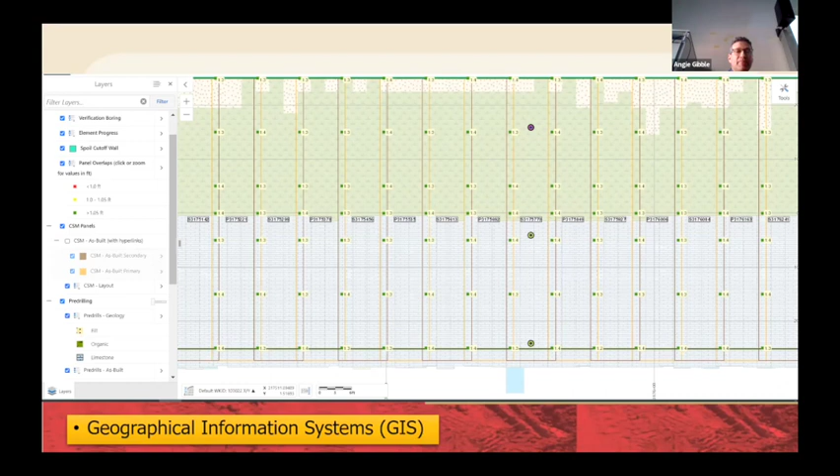What you really want is a dashboard that tells you the exact elevation and the exact location where the verticality is insufficient. You don't need to see every single depth cut, but it's there in 3D should it be needed.

Drawings and reports look like this. These are the same types of overlaps that you saw in the GIS, but this is something that can ultimately be printed and put in a filing cabinet, which some owners feel is still necessary. To me, having this accessible through a hyperlink in the database is acceptable. But here you have 3 different elevations at an overlap on either side of a secondary element. So this is the real digital twin that the owner will archive for a diaphragm wall.

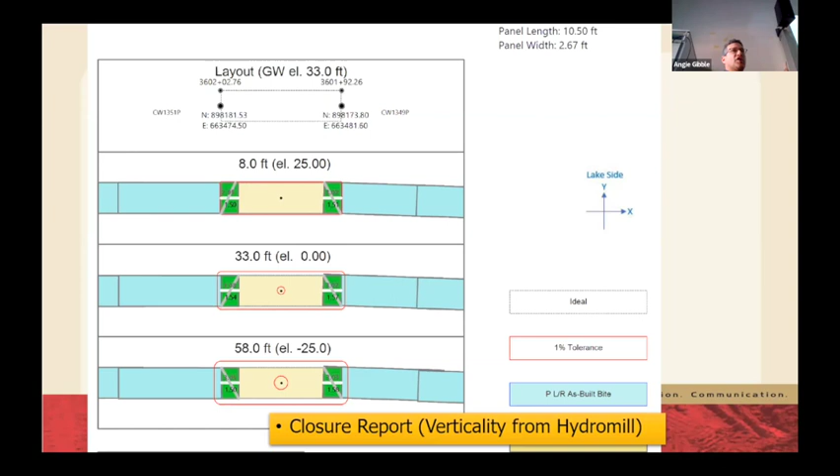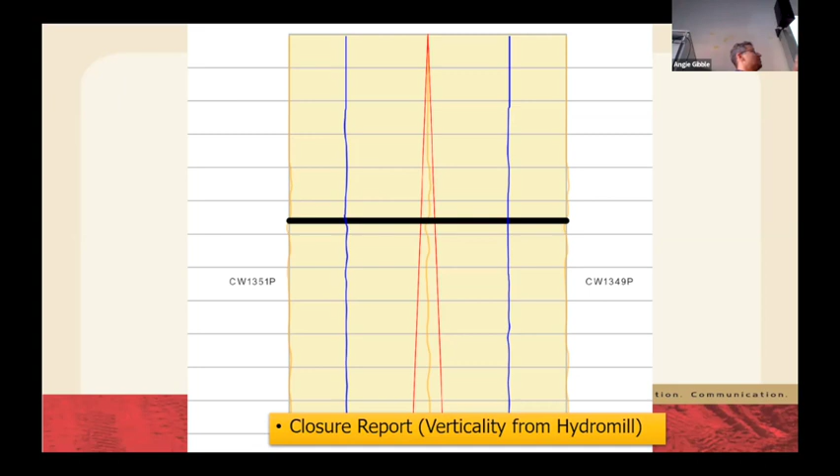Here's the same thing, but this is really page 2. You can see the continuous trace, in this case from a hydromill. It could be from any other drill methodology that measures verticality either during excavation or with an ultrasonic device or something after excavation once the slurry hardens. Different methods that will give you the same result, which is how vertical is my element? Does it sufficiently overlap?

Skipping ahead, thanks again for everyone sticking to their time. An as-built drawing, this is something continuously produced in GIS and exported to CAD, although it could be produced in CAD and exported to GIS if you prefer. But the point is, at the end of a given section of wall, in this case 500 feet, we have one continuous section, they call it a profile although it's not really a profile, with the overlaps at the 3 different depth cuts that the specs require. And this is another final work product that is archived by the owner and used for eventual acceptance of the project.

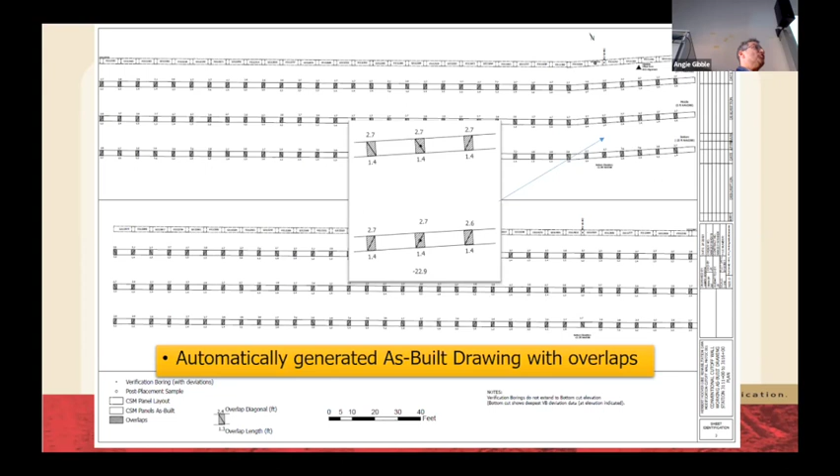We're trying to get a better understanding of if there are specifications at all, and to what extent they're similar in other countries. Please find me to discuss that if you have examples. And can we, at least in DFI or in conjunction with EFFC, get better use out of the work we've done in these specs and let those of you who don't have something similar get decent use out of it? So we'd love to see even a paragraph or 2 of this have utility elsewhere.

Sorry, I almost got it in time, in the reduced time, but I appreciate the invitation and being able to represent North America and DFI here for you.

Thanks very much, panel. Thank you for 5 very enlightening and very inspiring presentations. Really useful discussions from the audience. I think we'd now like to pose you 1 or 2 questions just to get your thoughts on some of the wider challenges and, more importantly, some of the solutions we should be looking at from an engineering perspective. I'd then like to open up the opportunity to our audience as well to pose questions to you as a panel. But perhaps if I could just start off with a nice broad opener: what do you consider the most important action we should be taking as ground engineering professionals to promote digitalisation in our industry?